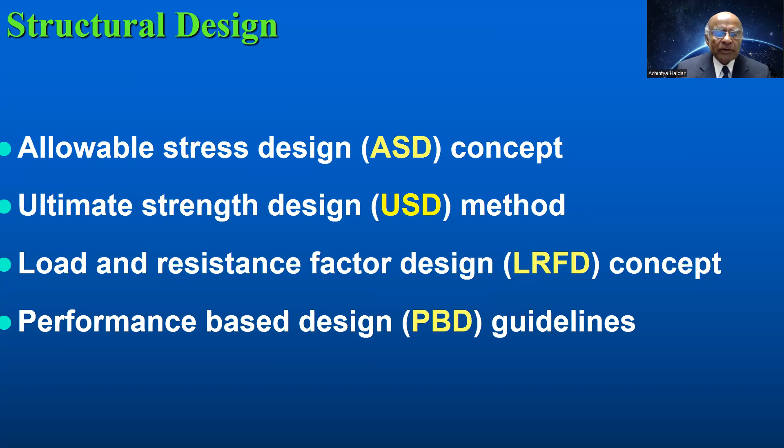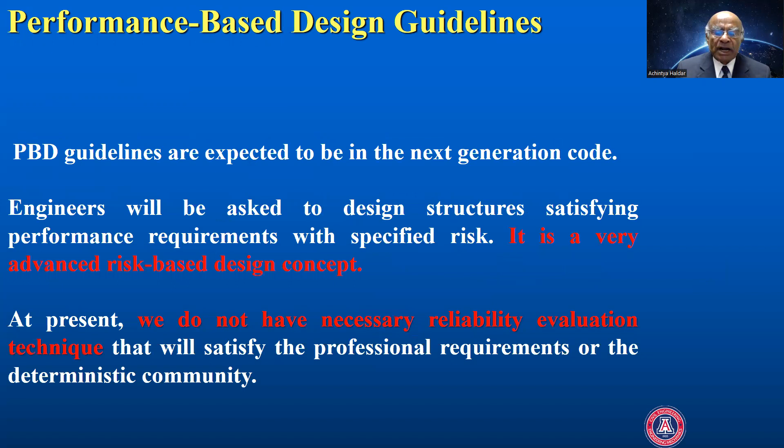In design, when I was a student, I used allowable stress design method. Then ultimate strength design method was introduced. To consider uncertainty in the load and resistance variable, we used LRFD, load and resistance factor design. And then, at least in the US, we are talking about performance-based design, PBD. PBD is a very sophisticated risk-based concept. However, when it was developed, they did not identify which program or which concept should be used for the reliability evaluation technique. There are different performance levels.

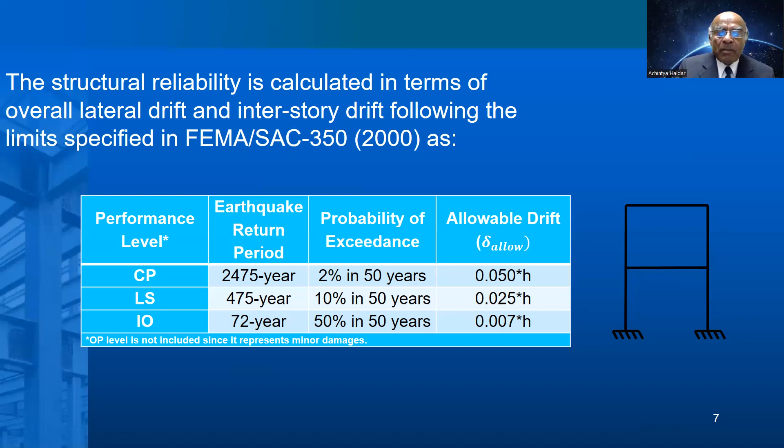During an earthquake, in the past we used life safety events, but now we observe there are a lot of economic consequences of earthquake, and to absorb those economic consequences, we call it performance-based design. They call it collapse prevention, life safety, and immediate occupancy. And you can see they are giving you the allowable drift values to take the risk. Basically, in performance-based design, owner or user can define or accept what risk they are willing to take and then mitigate it by buying some additional insurance.

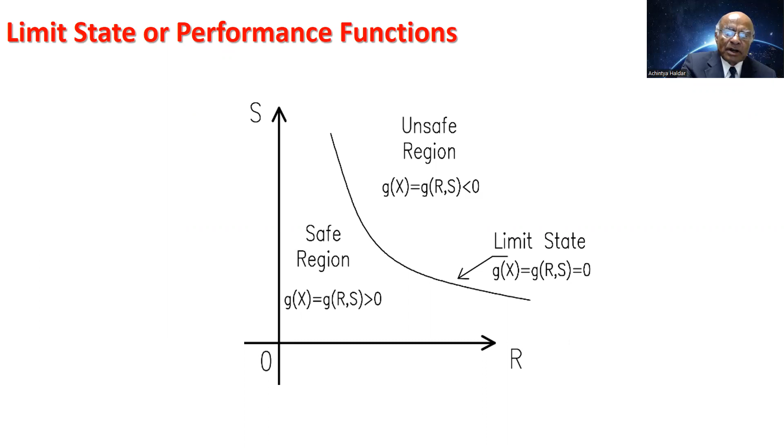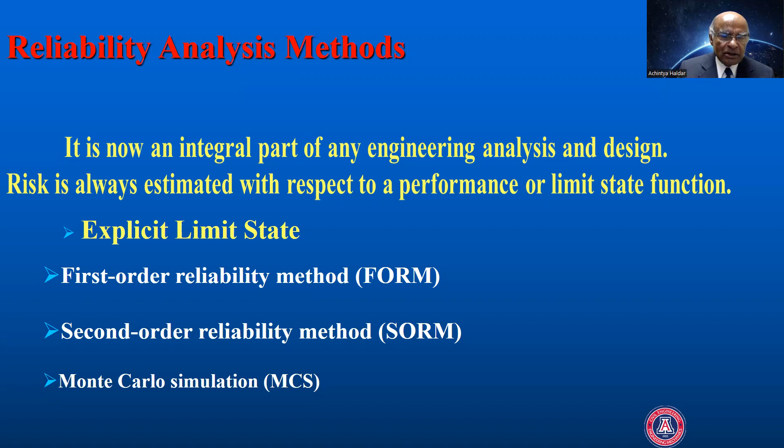Risk is always estimated with respect to a performance function. In this figure, conceptually, I am showing you what is the limit state. Above the line, it is unsafe region. Below the line, it is called safe region. And the reliability index beta would be the distance between the limit state function and the origin in the reduced variable space. Now, if that function is readily available, we call it explicit limit state function. That function can be defined in terms of all the random variables present in the formulation. We can then use first order reliability method to estimate risk, or second order, or Monte Carlo simulation.

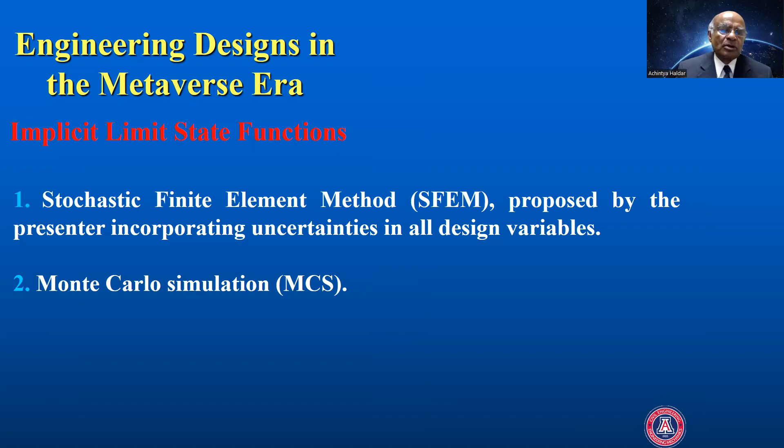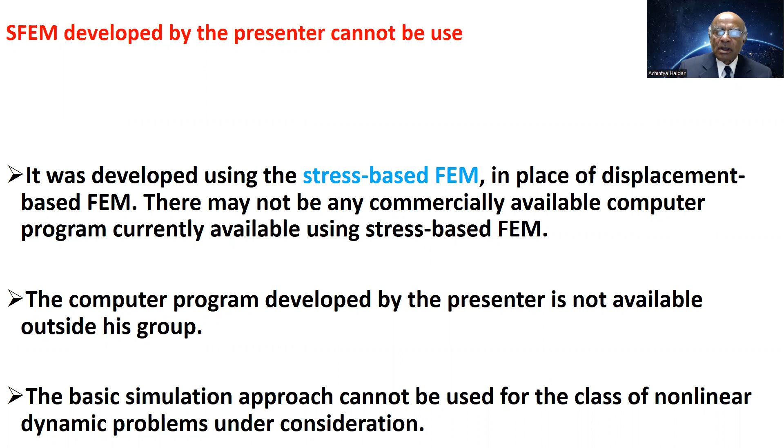In the metaverse era, our limit state function is not explicit, but implicit in nature. Monte Carlo simulation can be used for implicit limit state function, but I'll show you it cannot be done. Now, we can use the finite element method I developed earlier, but it is based on stress-based finite element. Most of you do not know what it is. You use displacement-based finite element method. It is a little bit difficult and complicated. And there is no computer program currently available in the market that you can use. And it may not be able to consider highly nonlinear problems and excitation applied in time domain. So for that particular reason, we really need to find an alternative to the stochastic finite element method I developed earlier.

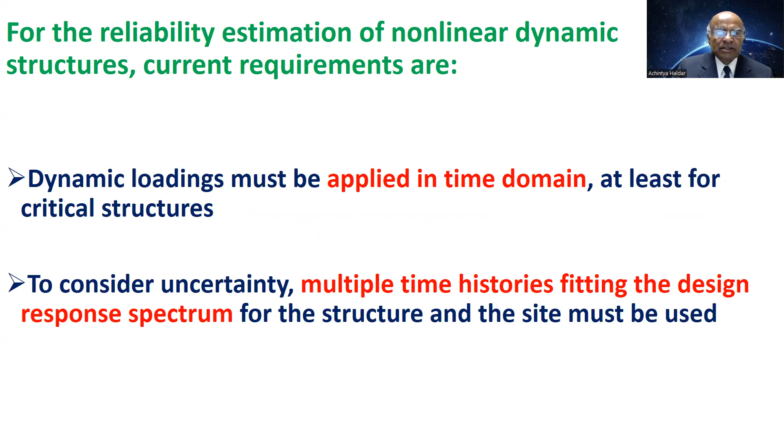Now, to consider uncertainty also in the dynamic loading in time history, we have to use multiple time histories satisfying the design response spectrum. Now, I'm going to talk about three different types of dynamic loading today. First one is earthquake, extremely irregular.

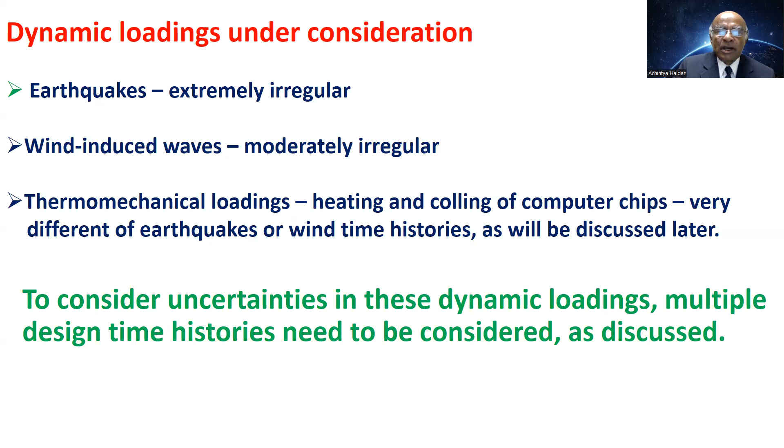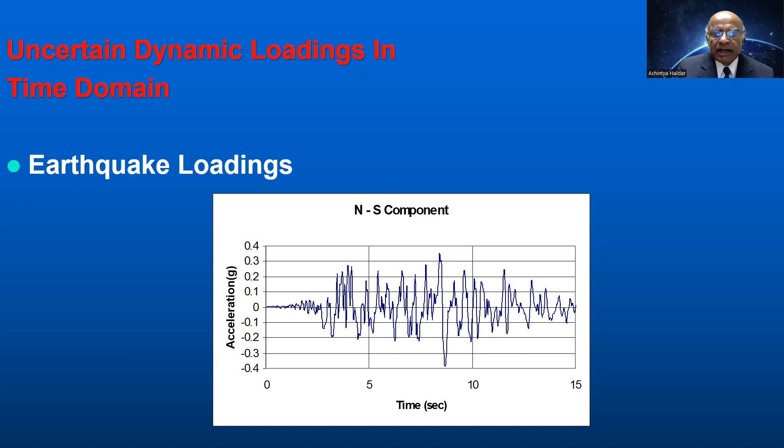Most of you have seen earthquake loading. Here I am showing the time domain of a typical earthquake for the first 15 seconds. It could be 30 seconds. You'll find that during an earthquake excitation, some building is extremely damaged and the building next to it did not suffer any damage.

What happened? When the frequency of the excitation and the frequency of the building match, it causes a resonance condition. And sometimes when it causes a resonance condition, you have failure. Sometimes when you don't have a resonance condition, you have no failure.

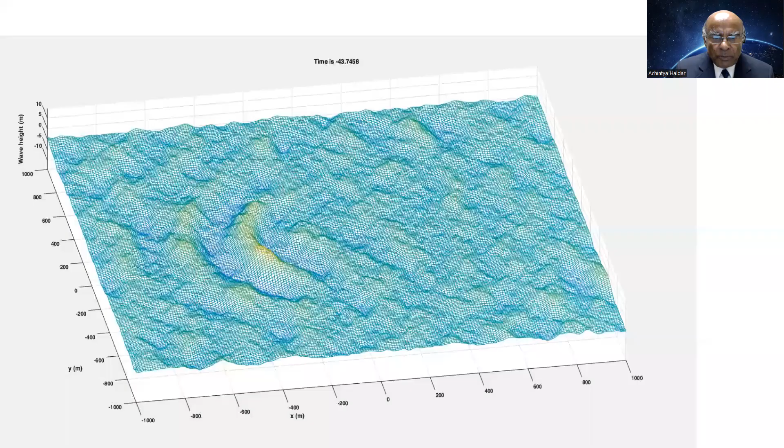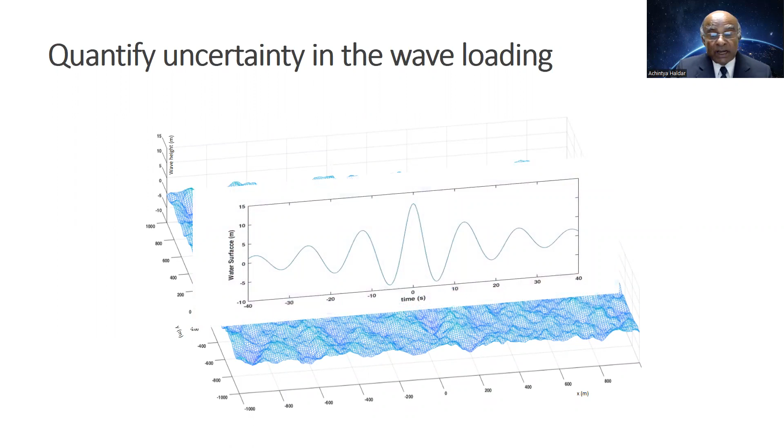Now, what we did, we developed a computer model for generating three-dimensional waves. I am showing it. It is an extremely complicated process. One slide may consist of about 150 megabytes of data. So we took that data, we took a slice, and then we can generate the corresponding time history of the wave. This is a very innovative concept we proposed.

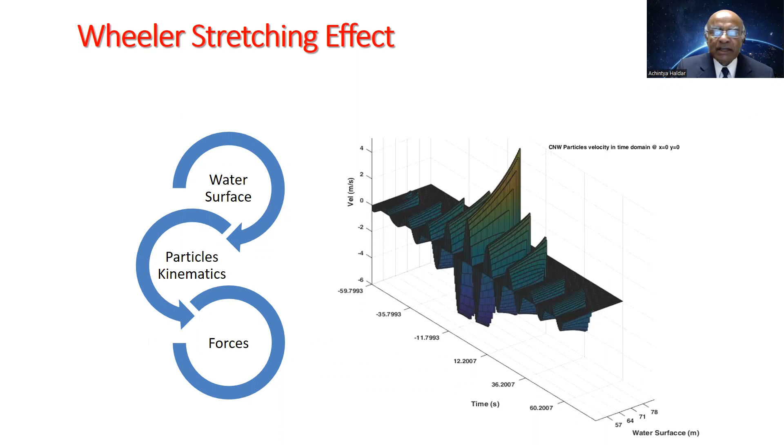Now for wave loading, there is another issue that we need to worry about: wave loading changes with the depth of the water. At the splash zone, at the mean sea level, we see that really, but when you go down below the water, the force attenuates, and this is known as the Wheeler stretching effect. We consider that also in our model.

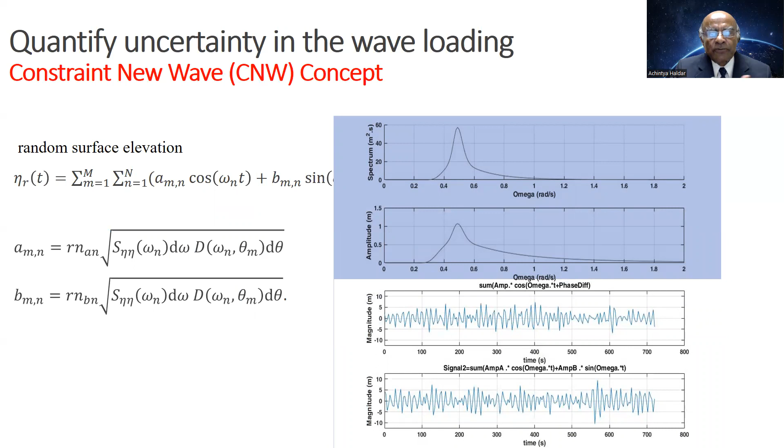So for wave loading, we can use the time history, and we use what is called constrained new wave theory, and we can generate multiple time histories for wave loading also. And then we can apply that wave loading to offshore structures, and we can calculate the underlying risk.

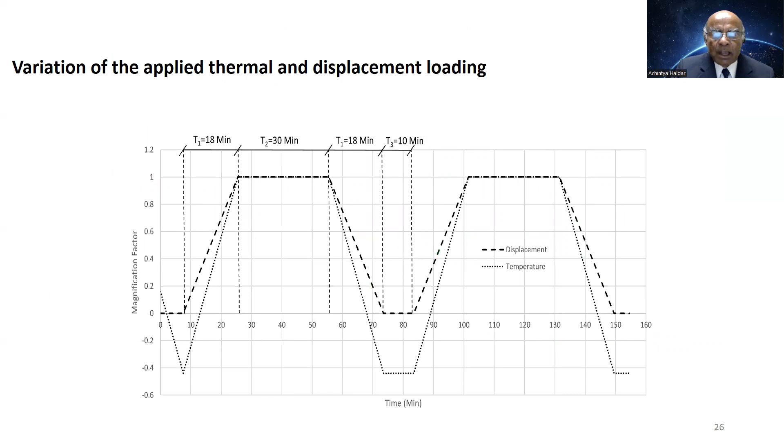For solder balls, it is heating and cooling of computer chips, and you can see it takes time to build up the heat, then it remains constant, then it drops, and obviously we have to consider that for that particular loading.

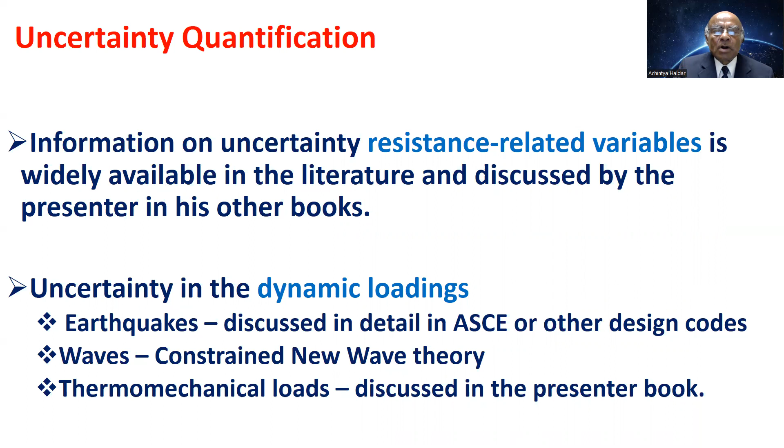Now, for risk we have to consider uncertainty for both resistance-related variables and dynamic loading. I gave you some brief idea about dynamic loading. For resistance-related variables, the area is well defined. The two books I talked about in the past can be used to find out how to quantify uncertainty in the resistance-related variables.

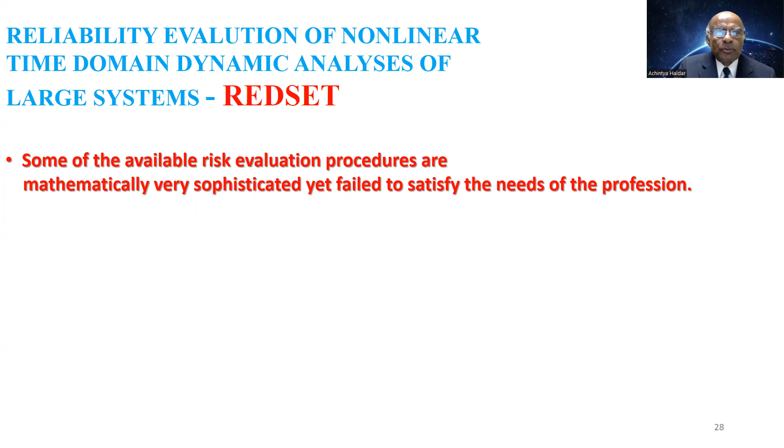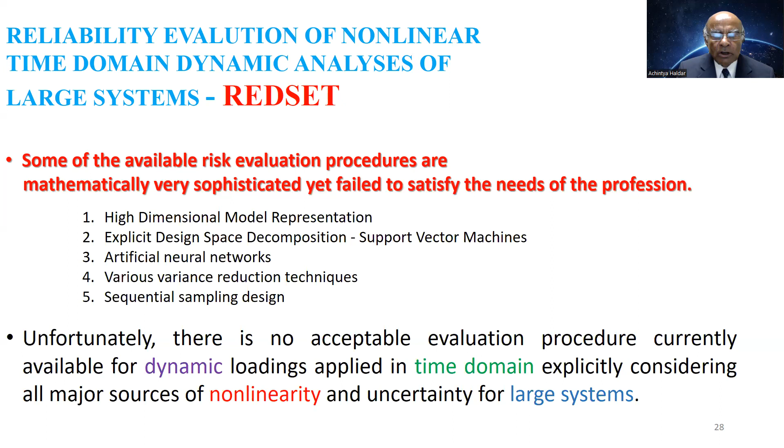Now, why do you need REDSET, the new method we are proposing? Because there is no method currently available. Some of the methods that are available, I am summarizing: high dimensional model representation, support vector machines, artificial neural networks, various variance reduction techniques, sequential sampling, but most of them cannot be applied in the time domain and cannot explicitly consider major sources of nonlinearity for large systems.

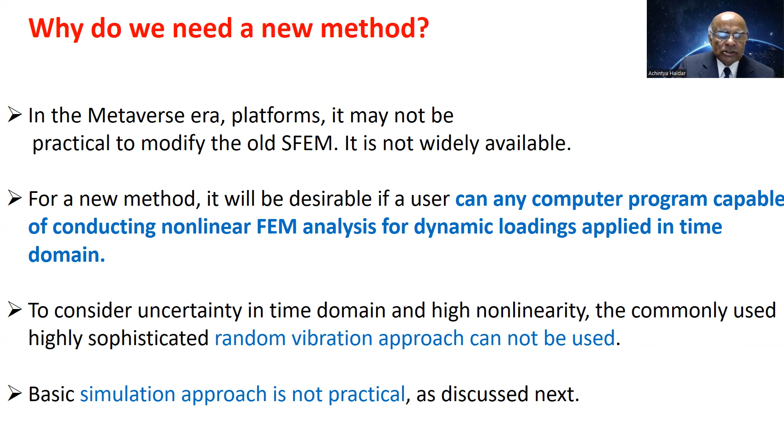Now, in our idea, since my stochastic finite element method program is not widely available, the ideal thing would be if a user can use any computer program capable of doing nonlinear finite element analysis, where excitation can be applied in the time domain, and you'll find it will provide an alternative to the random vibration approach. And I'll show you simulation cannot be used for this class of problem.

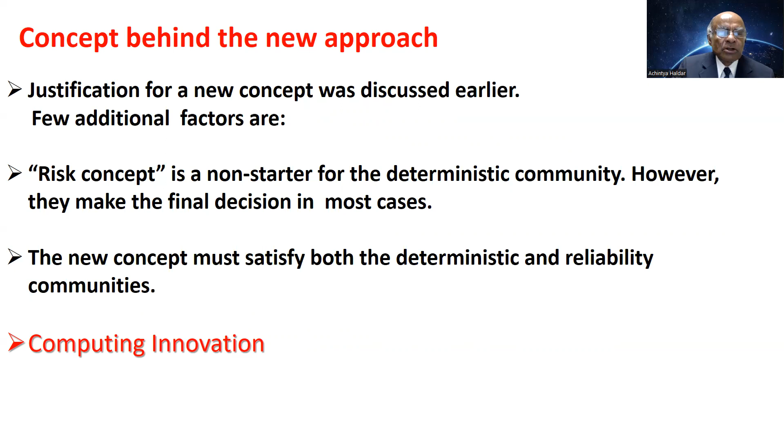The other point you need to consider is that the risk-based concept is a non-starter for the deterministic community. Your boss or my boss, they never heard of risk. So we need to make sure whatever we do, they also agree to it, because they make the final decision. So the new concept we are going to propose should be acceptable to both the deterministic and reliability communities. And that is the reason we need numerous computing innovations to develop the method.

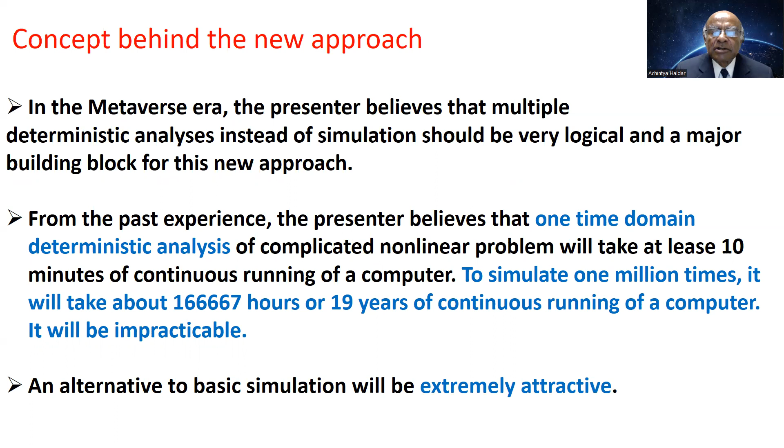So why simulation is not possible, I am giving you a very good example. Nonlinear time domain analysis of a small structure excited by earthquake loading may take about 10 minutes. If you want to simulate 1 million times, it would take 19 or 20 years of continuous running of a computer. And obviously, we need to find an alternative to the simulation method.

One option we thought: if we can generate, even approximately, the implicit response surface explicitly, then we can use FORM, the first order reliability method, to calculate or extract the reliability information. The RSM concept is a set of statistical techniques assembled to find the best value of the responses considering the uncertainty in the design variable.

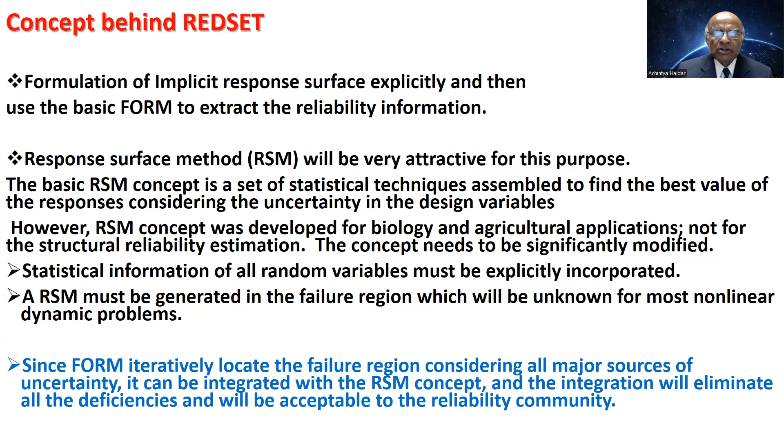However, it was developed for biology and agricultural application. They did not use the complete statistical information of random variable. Also, we need to generate the response surface in the failure region for structural reliability evaluation. That means a basic response surface method must be developed that would eliminate all the deficiencies of the original response surface method.

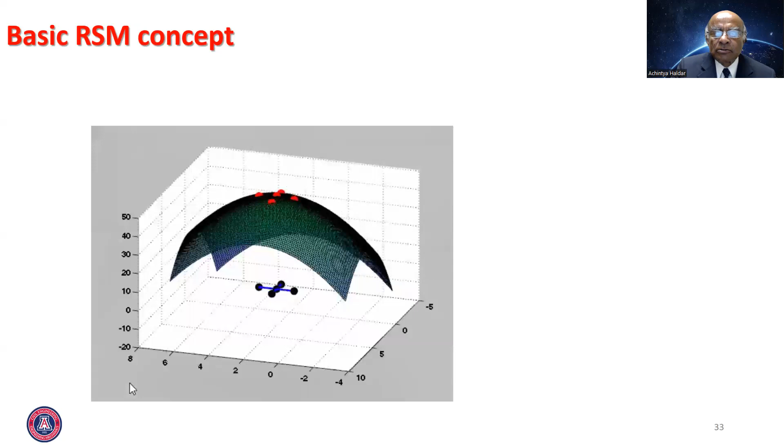Now, to show what is going on here, these black dots are our sampling points, and it is generating a response using the finite element method, any method you are going to use, and we need to fit a polynomial through those responses. Once I do that, then we can use the shortest distance. We can use FORM to find out the corresponding reliability.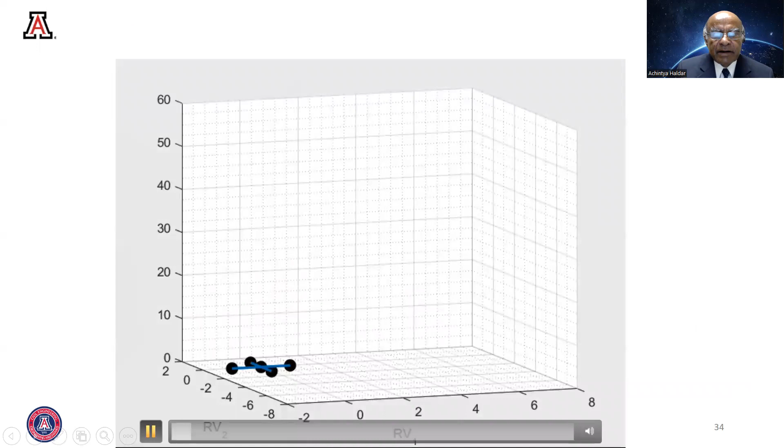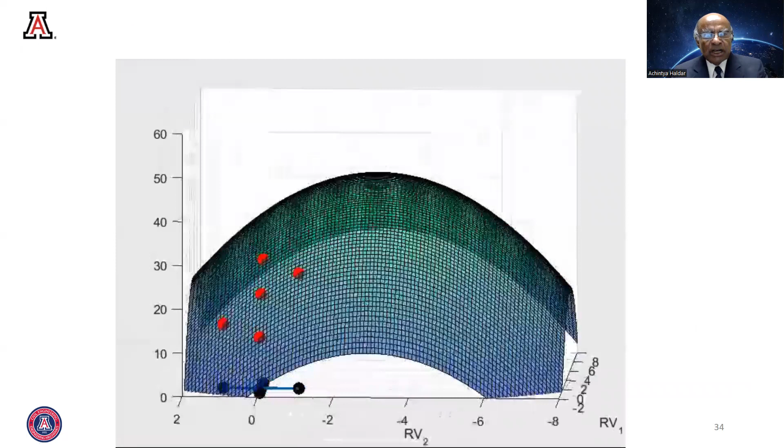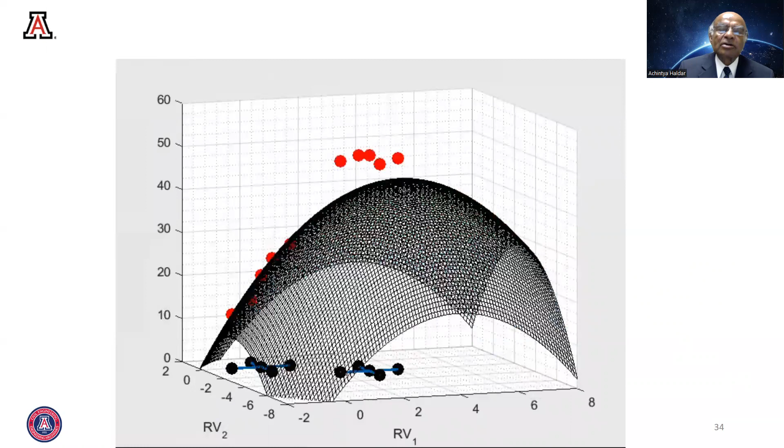As I said before, we are going to integrate FORM and the response surface method. The reason is FORM iteratively locates the failure point. So initially, we are going to take the checking point values as the mean values of the random variables, and we'll fit a polynomial through it. Then using FORM, we are going to get the next coordinate of the checking point. We'll calculate the response and we'll get another polynomial for it.

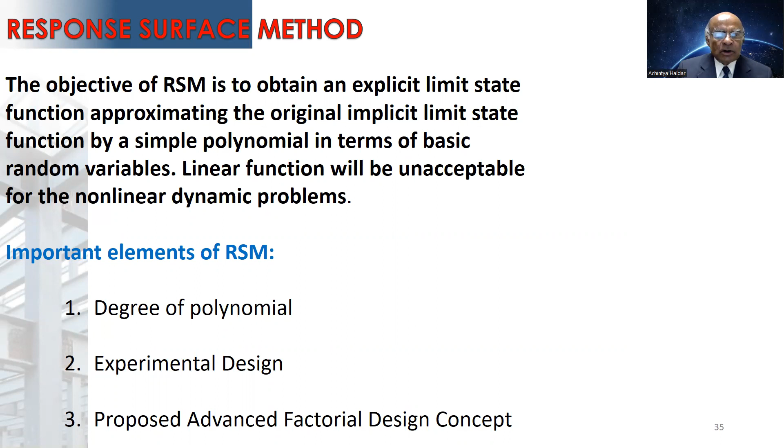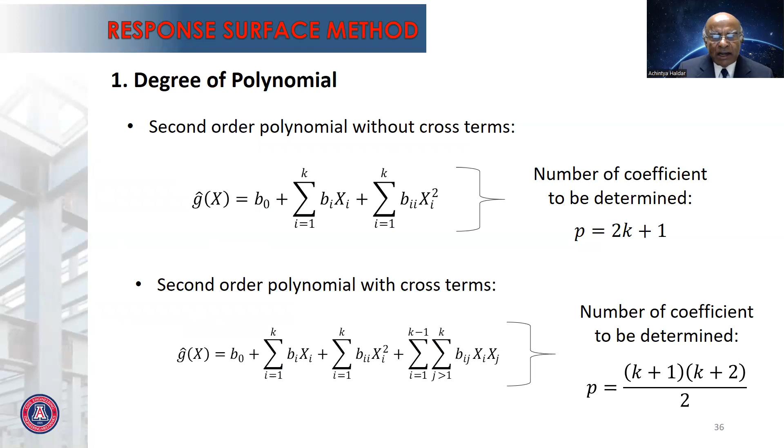Now, to fit a polynomial, what are the unknowns? Degree of polynomial. How do you select the experimental design points where you need to calculate the structural response? Now, a linear polynomial is not possible. We need to keep the degree of polynomial as low as possible, so we consider a second order polynomial. There are two alternatives: second order polynomial without cross term and with cross term. To define them, the coefficients B0, Bi, Bii need to be estimated. Estimating those parameters is a very big challenge, and it depends on the efficiency of your algorithm.

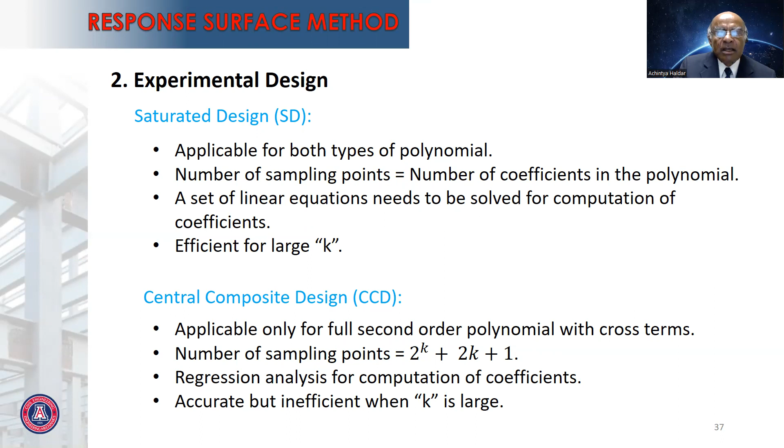Two currently available methods are used for this purpose. One is called saturated design. It is relatively simple, but it is not that accurate. It can be used for both second order polynomials, without cross term or with cross term. The more advanced or accurate technique is called central composite design. It is only possible for second order polynomial with cross term, but it is very, very difficult. And here we are just trying to show what I'm talking about.

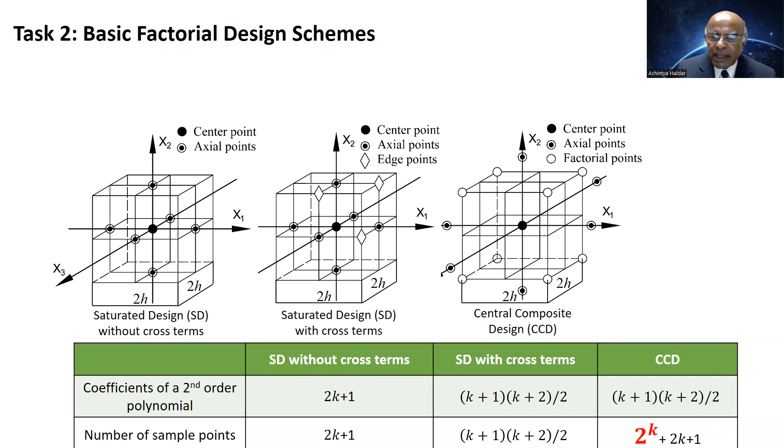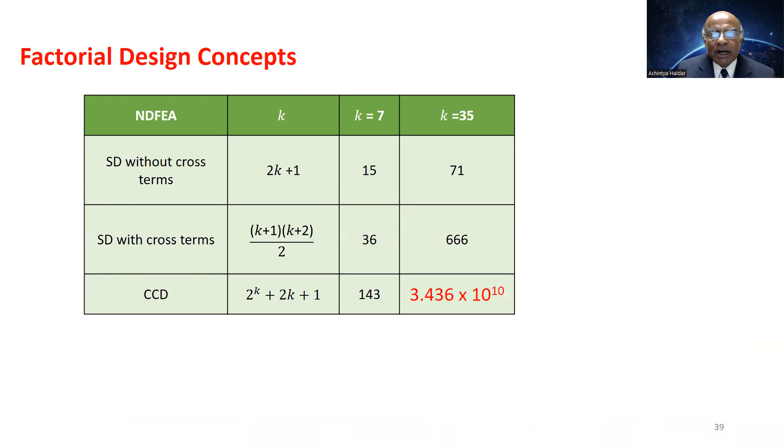These are the three: second order polynomial without cross term, with cross term, and CCD. The number of coefficients indicates the number of deterministic finite element analyses you have to conduct. But when I use CCD, it will be 2 to the power k, and that is going to show up here. k of 35 is not a large quantity, but if you calculate how many times you have to do deterministic evaluation, it could be of the order of 10 to the power 10, obviously not possible.

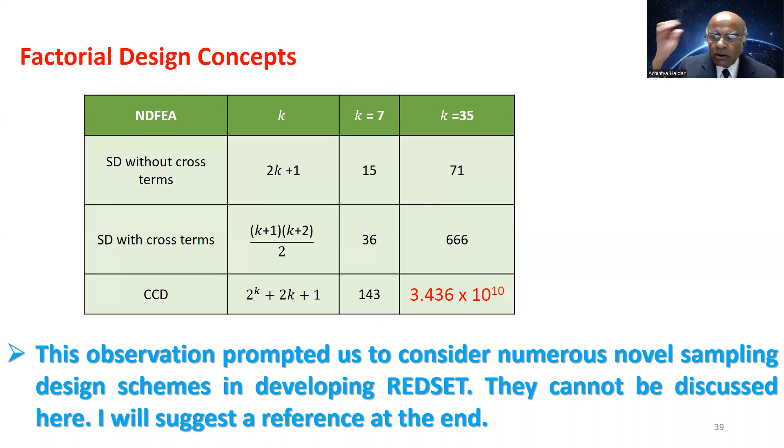So in developing REDSET, we do the first iteration and the intermediate iterations using SD without cross term. Once we locate the failure region, we use CCD to calculate the risk accurately, but you can say that we cannot implement CCD. For that, we developed numerous innovative sampling design techniques. I do not have time to talk about them here, but I'll give a reference for that.

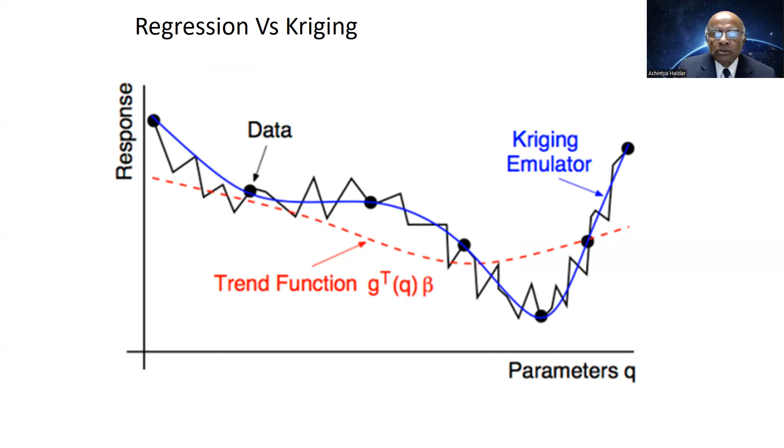Before moving forward, in CCD, what do they do? They use regression analysis. Regression analysis is only valid in an average sense. It doesn't go through the response quantities. So we use another numerical evaluation. The innovation is the Kriging approach, and you can see the Kriging approach goes through the responses, all the black dots.

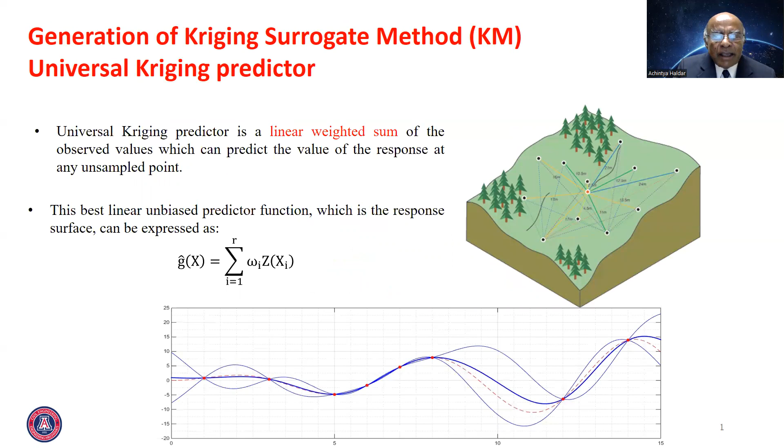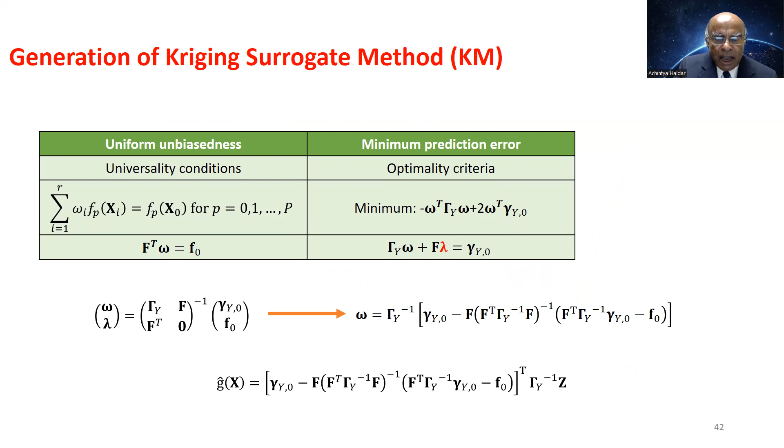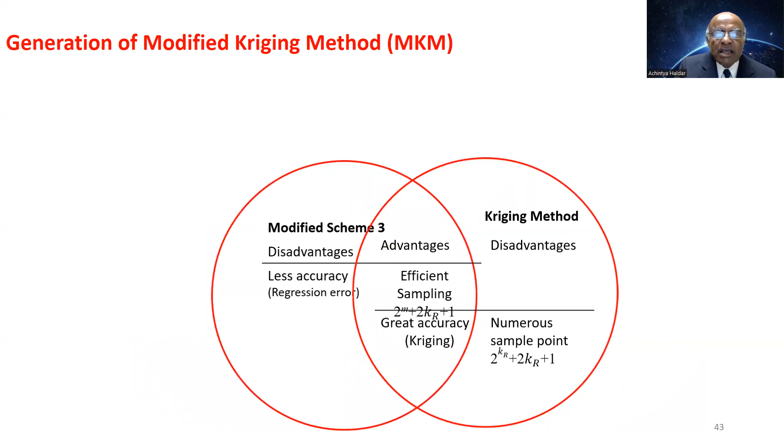Kriging was developed for application in gold mines, and it was not developed for structural reliability evaluation. We have to use a weight factor. It is mathematically very complicated, but I'll give you a reference. We can calculate that response explicitly, and then we can use the Kriging method with other sampling schemes to develop the REDSET method we proposed. We cannot go too much into detail, but then we wanted to verify the REDSET method.

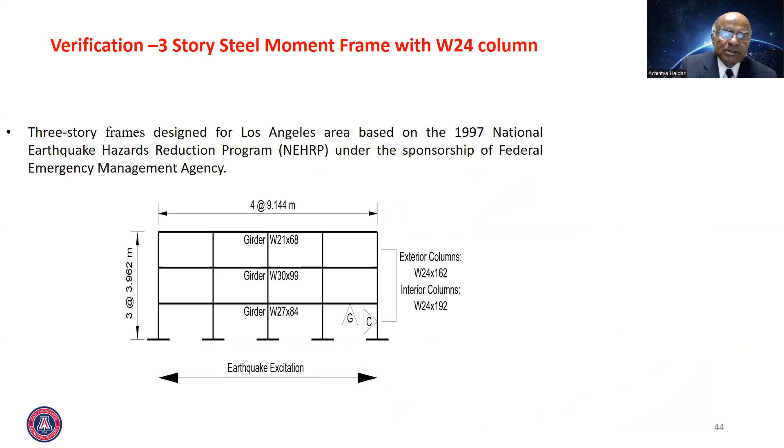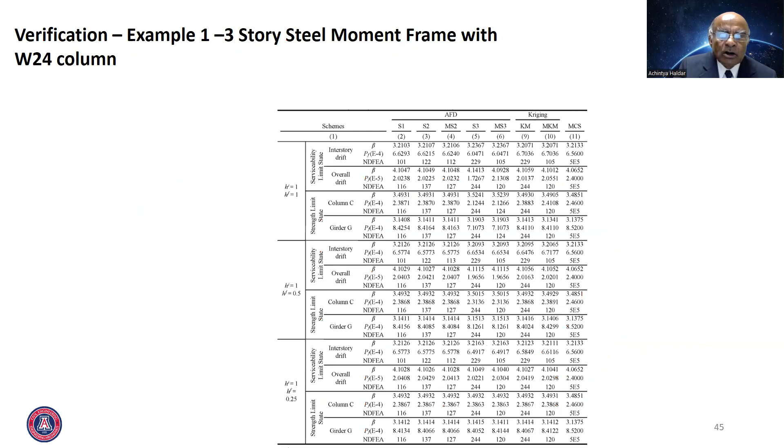We took a relatively simple small frame, and we excited it by an earthquake time history recorded in the past, and we calculated the risk of failure of most of the structural members. It is not readable, so I'm going to amplify them. And you can see here that when I use Monte Carlo simulation, we are using about 500,000 simulation cycles. But using REDSET, we are using only 100 or 120 deterministic analyses to extract the reliability information.

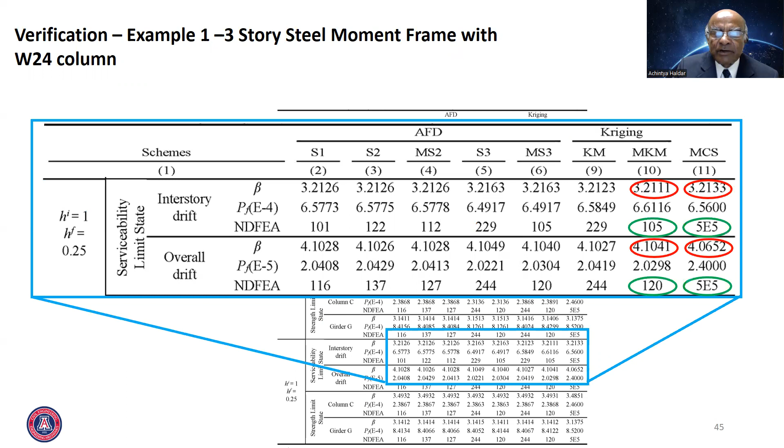Now, after that, and before we move forward, it took us about 1,000 hours to verify that program. So you may say, how did I get that? One weekend on campus, we integrated as many computers as were available to us, and we got the result.

After the successful verification, then we took a case study. A building in Southern California suffered a tremendous amount of damage during the Northridge earthquake of 1994. NSF provided a lot of funding to investigate that building, and they identified which members failed and which members did not fail, which members suffered minor damage, and many different things.

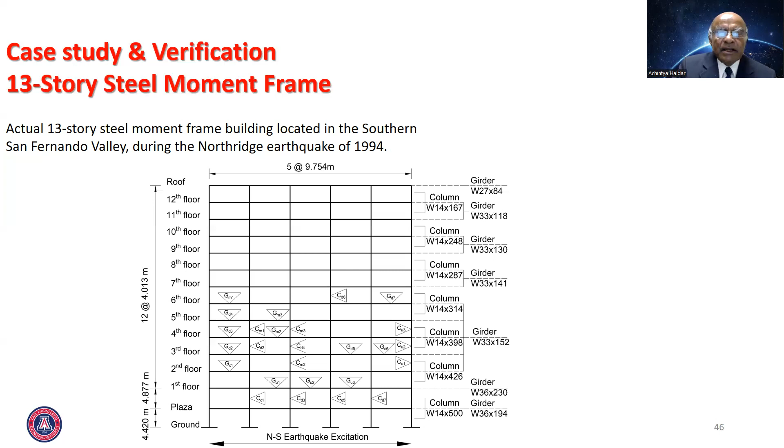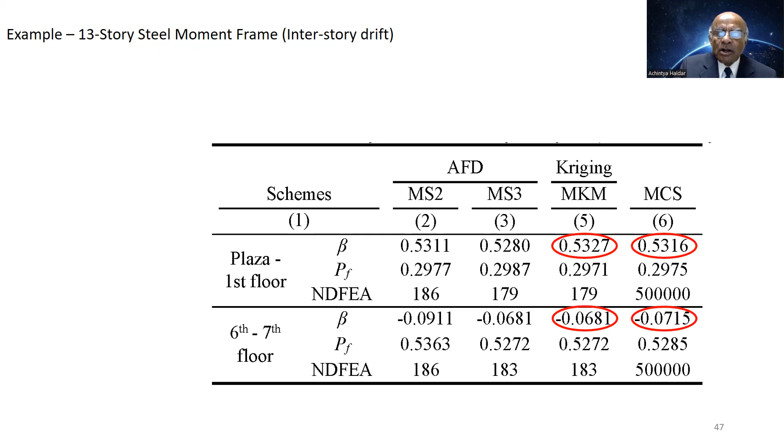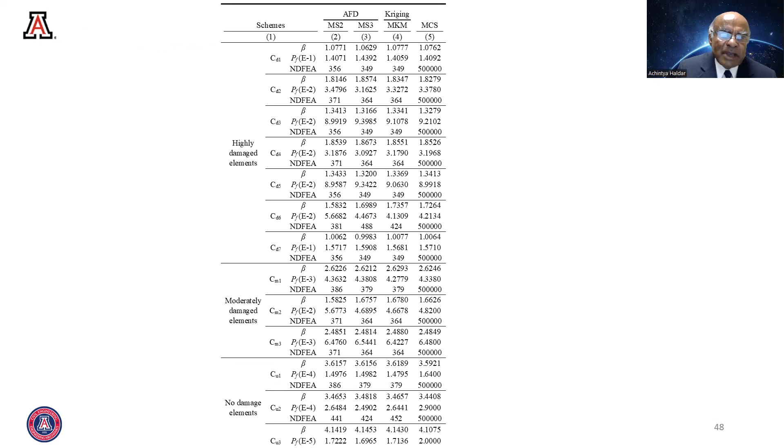We took the earthquake time history recorded closest to the building, excited that, and then we found out that for some of the members which failed, the probability of failure is of the order of say 50% or 30%. We are looking for about 10 to the power minus 4 or 10 to the power minus 5. Now, to show the capabilities of this REDSET, we estimated reliabilities of most of the members in the frame. We identified highly damaged, intermediate damage, and no damage areas. And that is the very unique feature of our method, really.

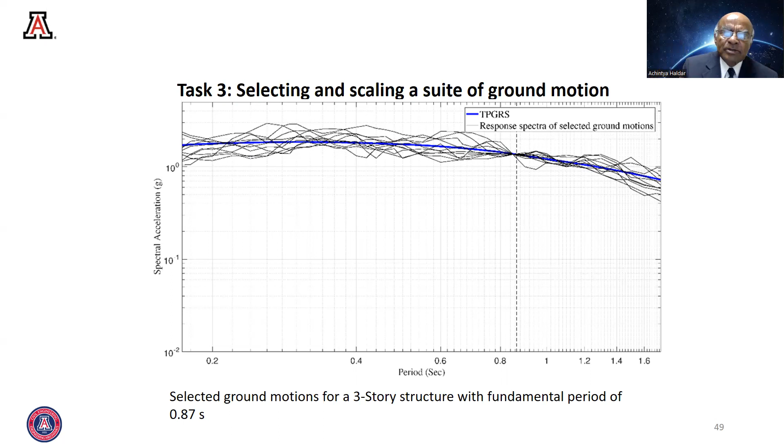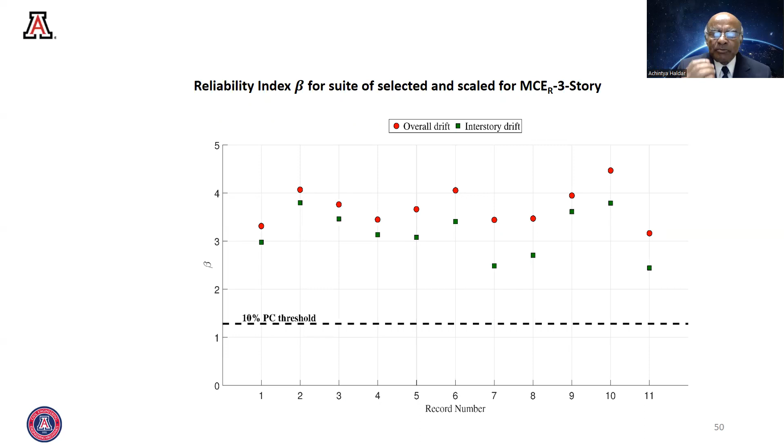Okay. Now, as I said before, we need to use multiple time histories to consider uncertainty in the excitation. For earthquake, we have the ASCE standard. They suggest using either 7 or 11. We use 11, and we showed different earthquake time histories. We can do it. And if we use those 11 different time histories, they are going to give you a different probability of failure for each case. Your task could be to reduce the width of that band as much as possible. And believe me, by changing the properties of one member, you can meet that objective.

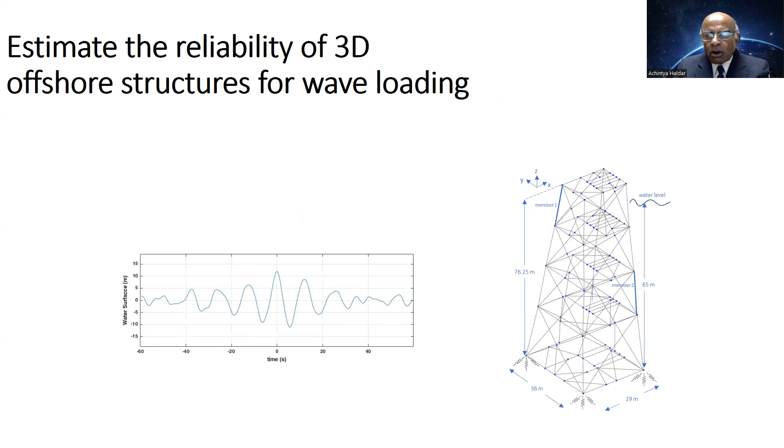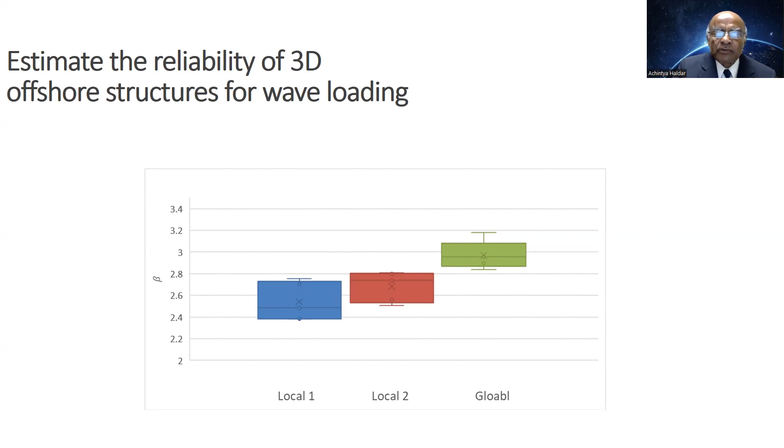For the wave loading, we are going to use that load on this particular structure. We got the probability of failure, and it matched Monte Carlo simulation very well. Here you'll find that the green is for lateral deflection. Offshore structures are very strict about lateral deflection. The blue area is members in the splash zone, and the splash zone means the probability of failure is much higher, the beta value is lower, and the orange line is the probability of failure for members away from the splash zone.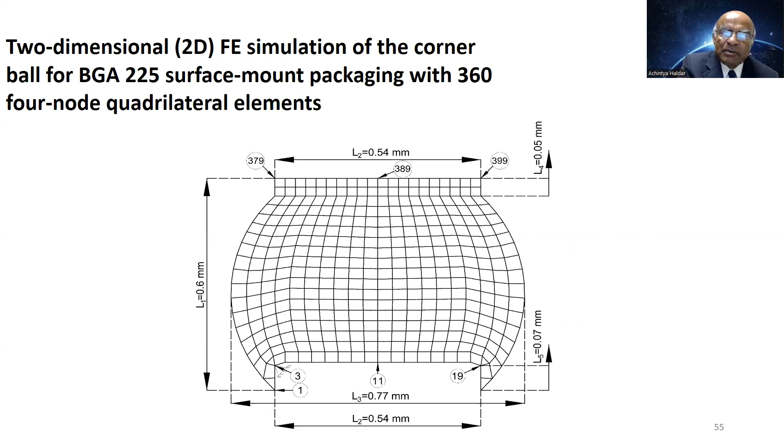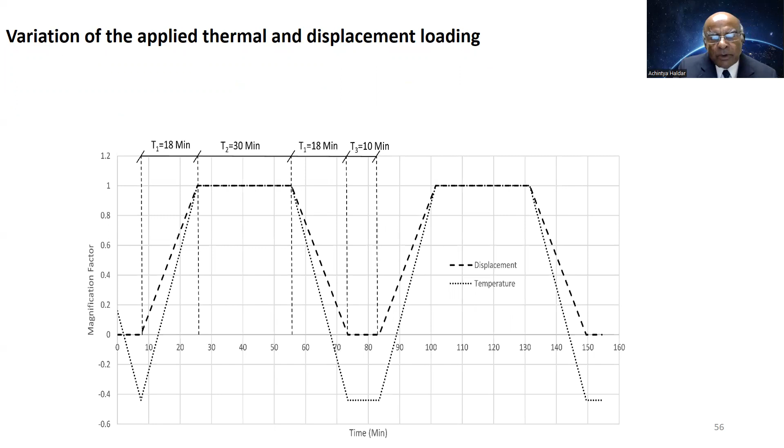Then we took the solder ball, and you'll find we represented it by finite elements. You can see the dimension has changed significantly. It is in millimeters. Now we consider uncertainty in the time history. We talked about it; I'll give a reference later. And we presented the probability of failure. The solder ball we used was tested experimentally. It failed at 3200, and you can see the probability of failure is 90%. There is no mathematical basis for it. Here, material nonlinearity is the basic problem of failure. We submitted a paper in the Electronic Packaging Journal, and the reviewer thought our work was groundbreaking.

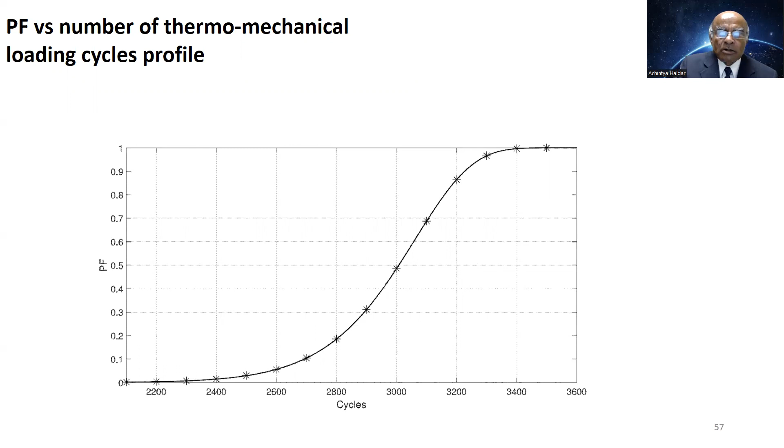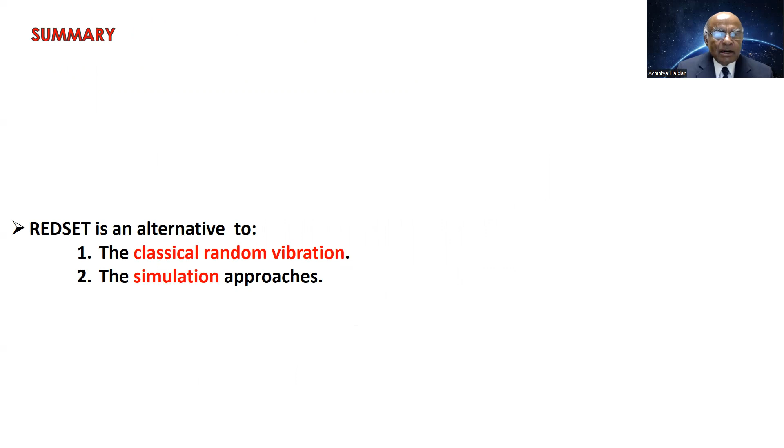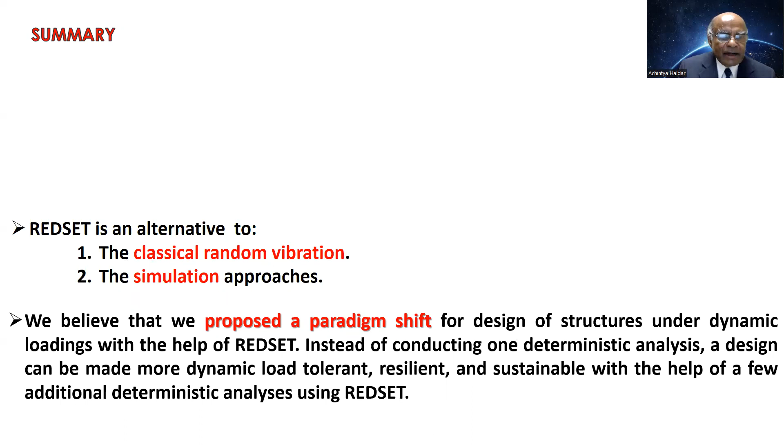So briefly, I talked about how we found an alternative to the classical random vibration and simulation approach. We developed a paradigm shift. Instead of conducting one deterministic analysis, a design can be made more dynamic load tolerant, resilient, and sustainable with the help of a few additional deterministic analyses.